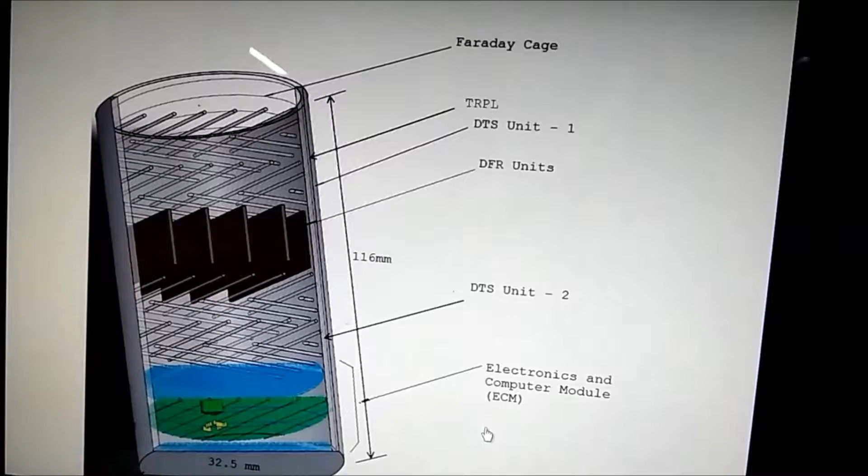So let's get started with our first video log. Let us start with the concepts behind our first preliminary design. This was our initial model. It was a cylindrical design having a circular cross section, and it consisted of three modules.

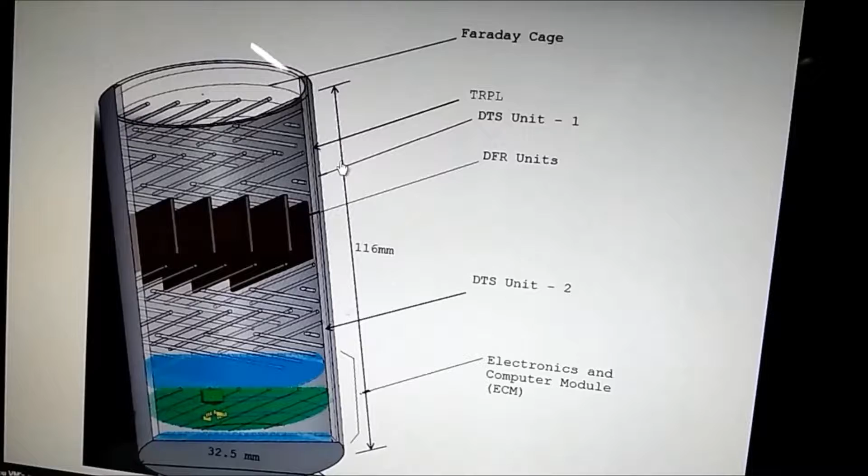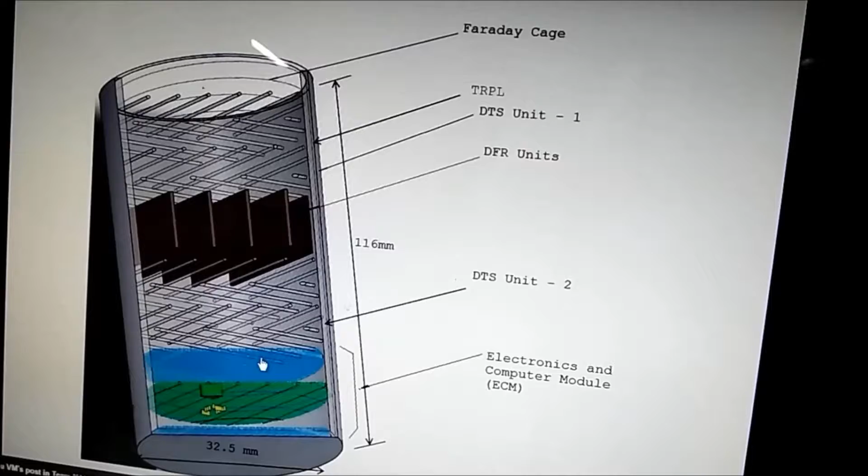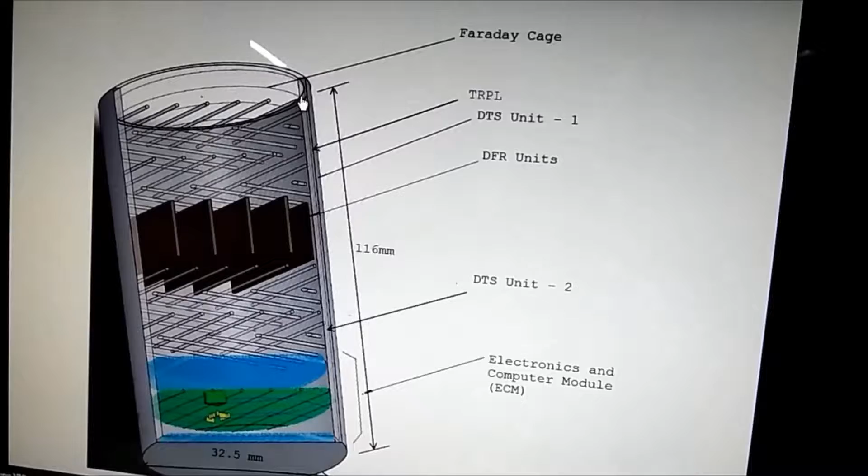One was the sensor module from here to here, there was a dust accumulation rate analyzer, this blue portion you can see, and below it there was the electronics and computer module. This complete system was enclosed by a Faraday cage to avoid any kind of external noise, and the whole module was coated with a thermal protection layer.

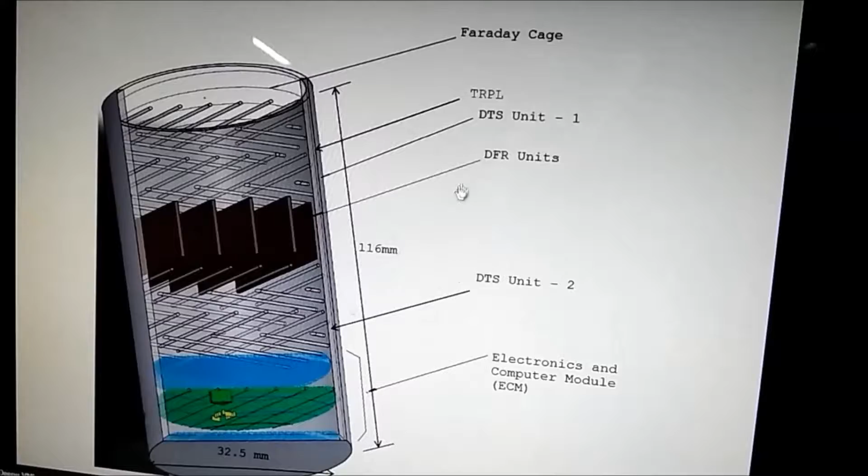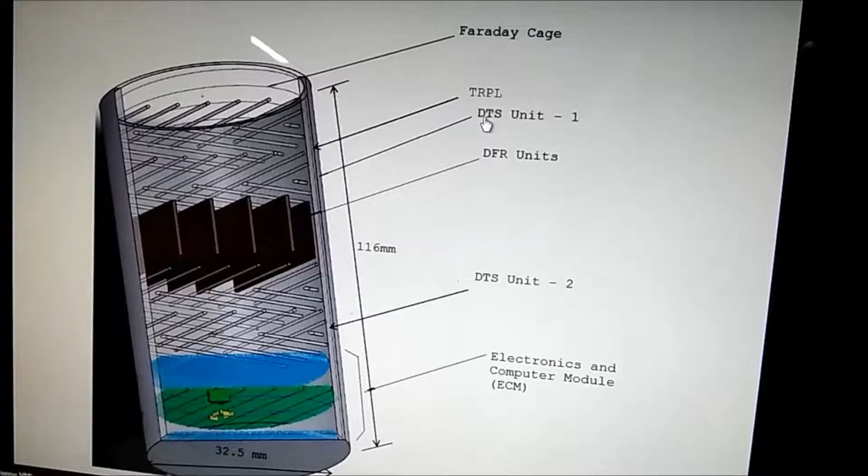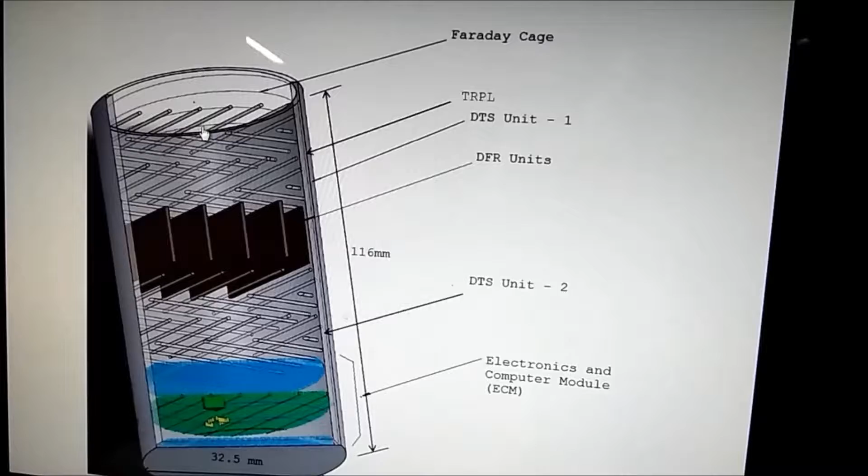Now this sensing module had three units. One was the DFR unit, which is the deflection field region. I'll explain it. And there were two DTS units, DTS 1 and DTS 2. What is DTS? DTS is the dust trajectory sensor. Each of these had 4 layers of electrodes, stainless steel wires, which sense the charge and the trajectory as well as the velocity of any charged particle entering the instrument.

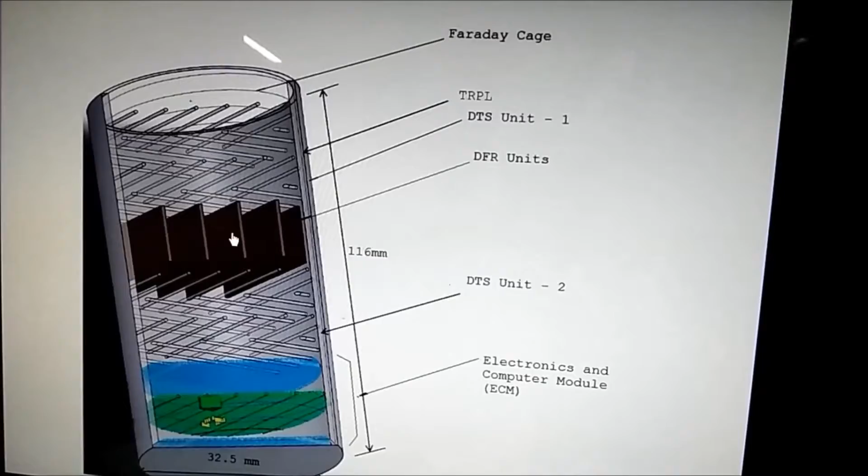Now this deflection field region was used for measuring the mass of the charge. This is our sketch, taken from some literature. This is the first DTS unit and the second DTS unit. These are the layers of the electrodes, and these are the electrodes of the DFR unit. Any charged particle which enters, its direction as well as velocity is detected by the first DTS unit and later by the second DTS unit.

Now these electrodes of the DFR unit have different electric potentials on consecutive electrodes, one with plus 5 kilovolt and the second with minus 5 kilovolt. So any positively charged particle is deflected away from the positively charged electrode, and the deflection is measured from the difference between the trajectories of the two DTS units. This is the whole idea behind our instrument and sensing the parameters of any charged particle.

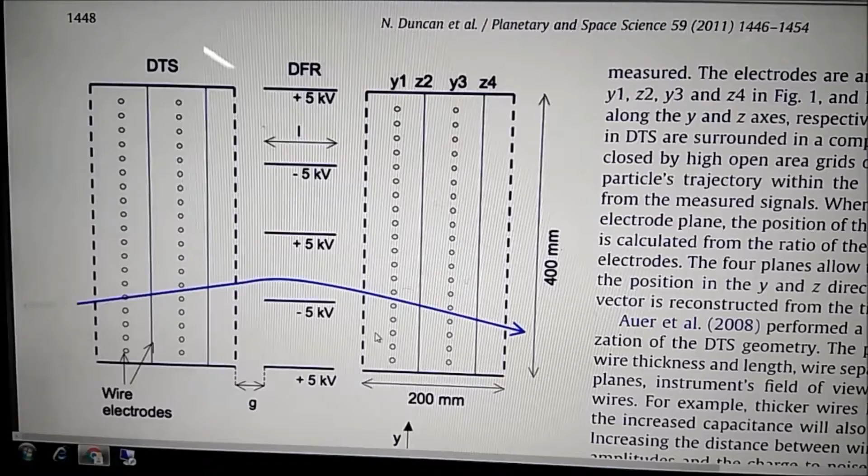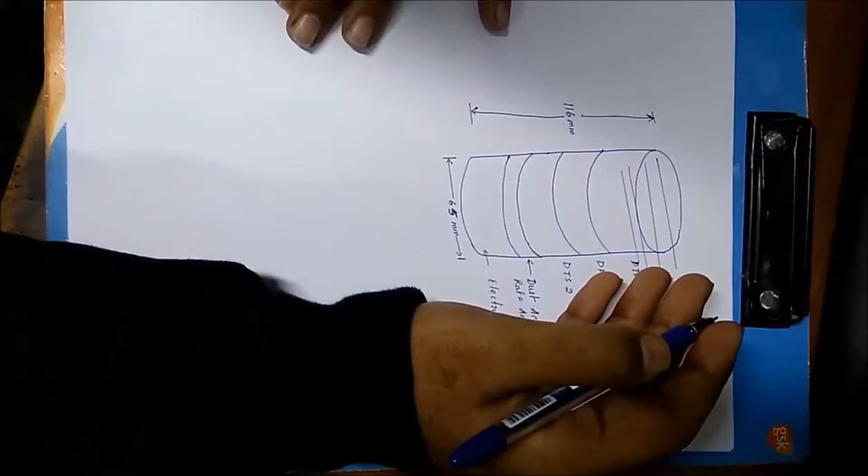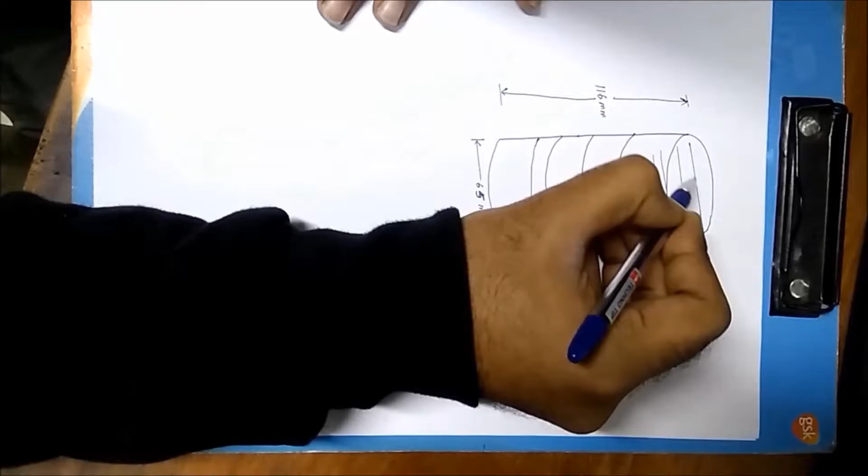So this is our sketch of the design. Each DTS had 4 layers of electrodes, coming out like this. Suppose we are using 5 electrodes per layer. We have to connect one end of each electrode to an amplifier unit, which takes the induced charge signal through the electrode, amplifies it, and gives it to the electronics module, where our onboard computer takes it as input and stores the data or does whatever post processing we need.

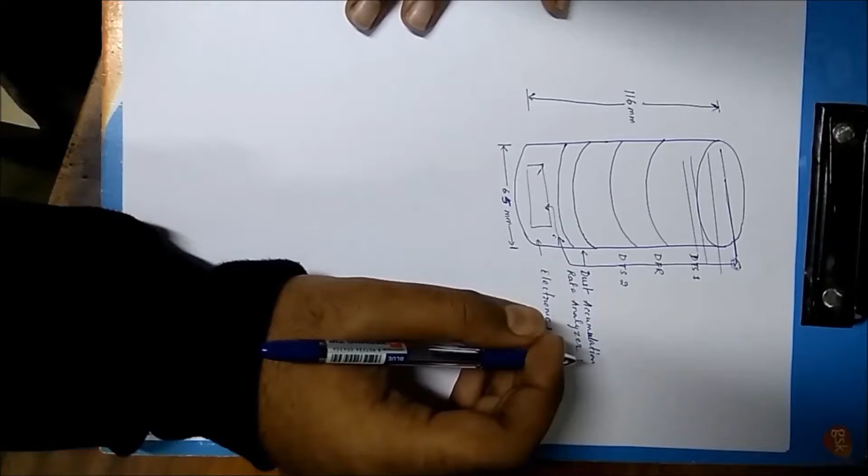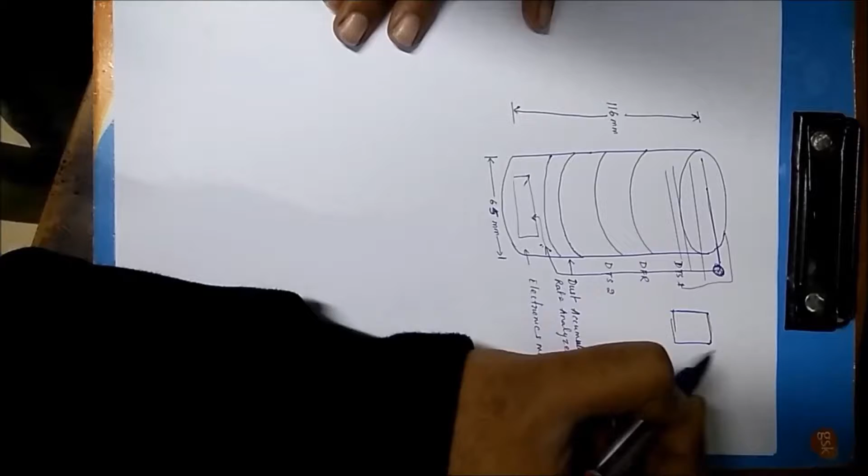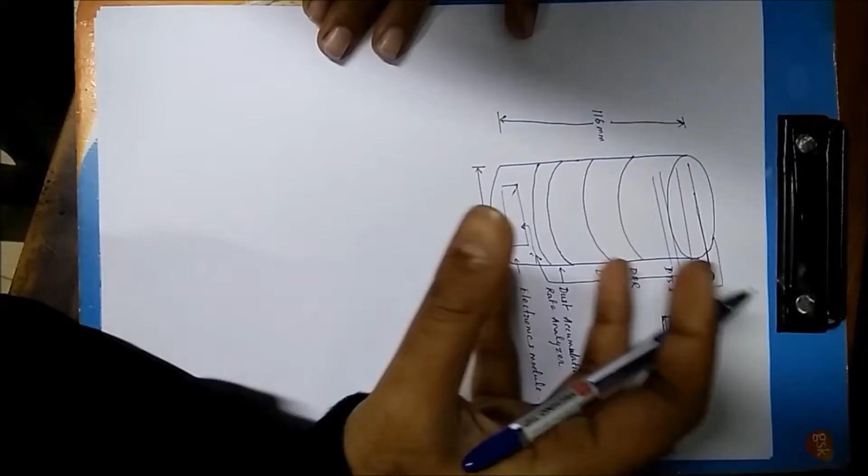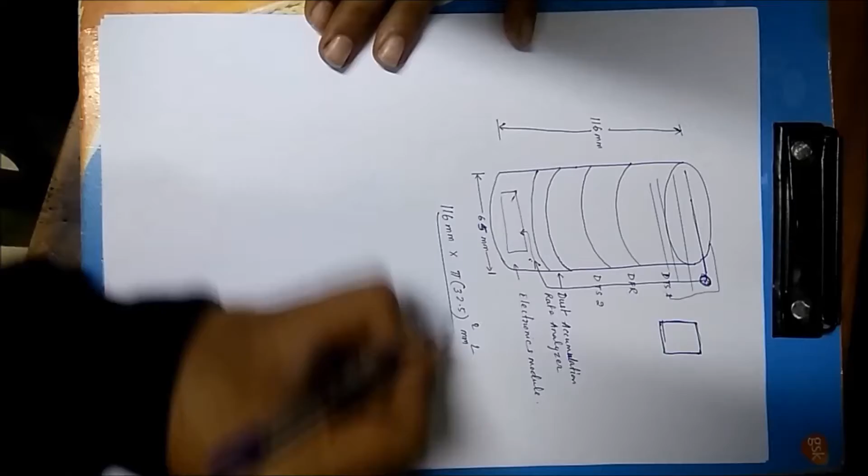But to accommodate these amplifying circuits, we need some space first. Second, there were some scaling issues as per the similarity rule of the literature we are following. If we need to scale down the model they used, we have to follow a similarity rule. That's why we have made some changes in the physical dimensions of our model, but the overall volume we have kept constant, that is 116 mm into pi into 32.5 squared mm squared. This volume is constant, but the physical dimensions changed.

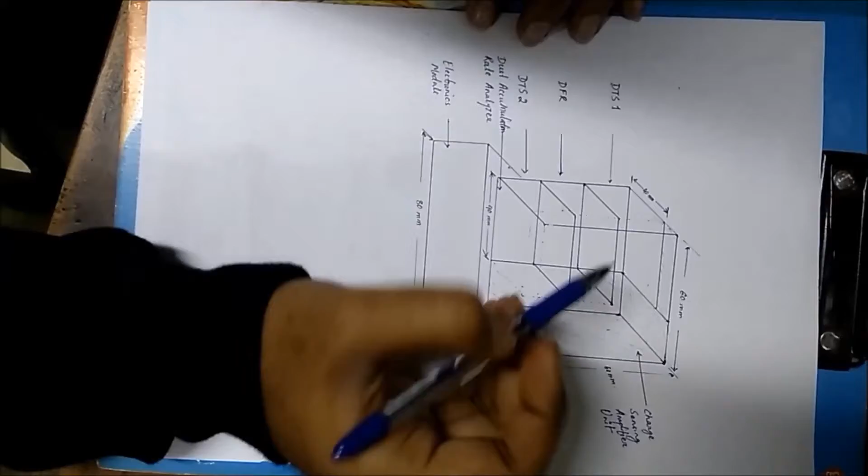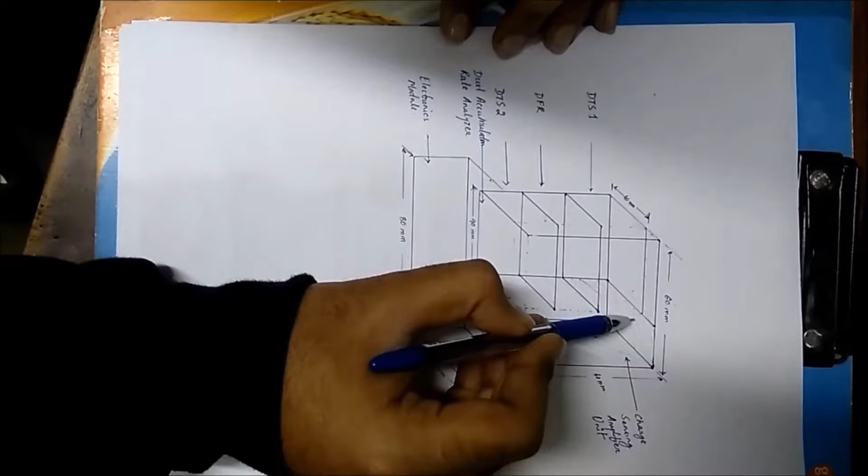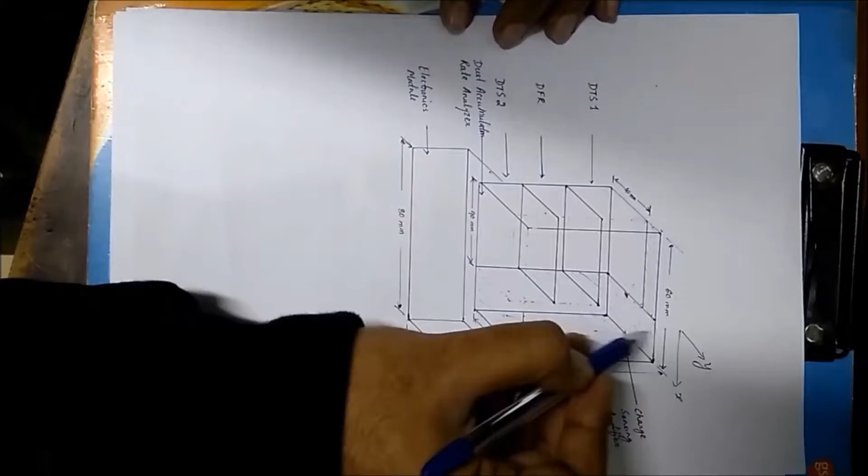So it will look something like this now. We have made our dust sensing module with a 40 by 40 mm cross section and a length of 80 mm. The charge sensing amplifier unit will be accommodated in the remaining 2 centimeters of space from this axis. Suppose this is the x axis and this is the y axis, we can have 2 centimeters on this side and 2 centimeters on this side, so the total box cross section will be 8 by 8 centimeters, and the height of the box would be 8 centimeters.

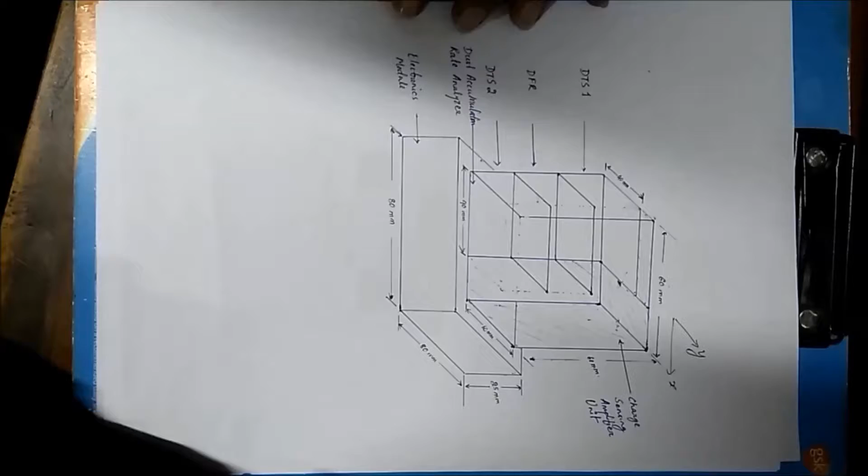Now we can accommodate our dust accumulator unit and electronics computer module in this 8 by 8 cross section module here, which will have a height of only 25 mm, so we are constrained to the overall volume and not exceeding it.

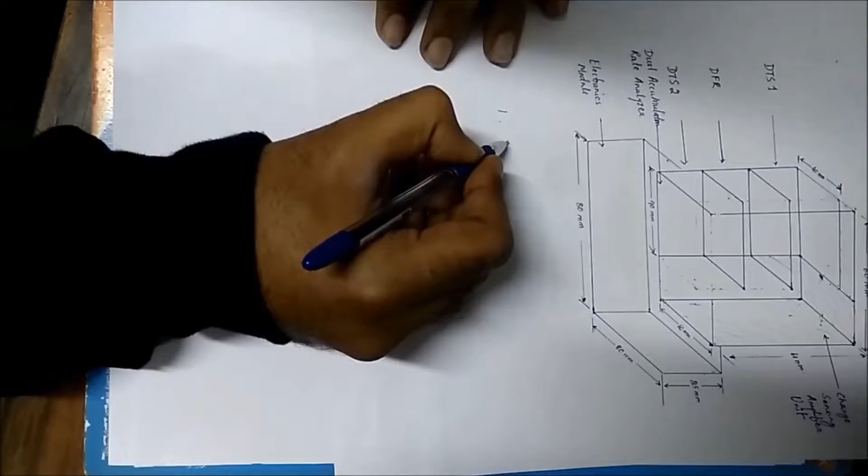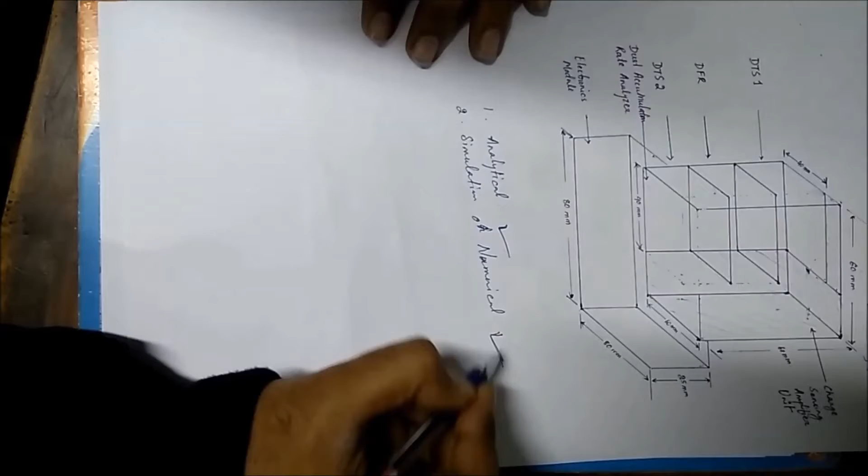Now we are doing some simulation work. Let me tell you the steps we are following, which we already mentioned in our abstract submitted last August. First is our analytical process, which we have already finished. Second is simulation, or numerical solutions, which we are doing now. We are currently on this.

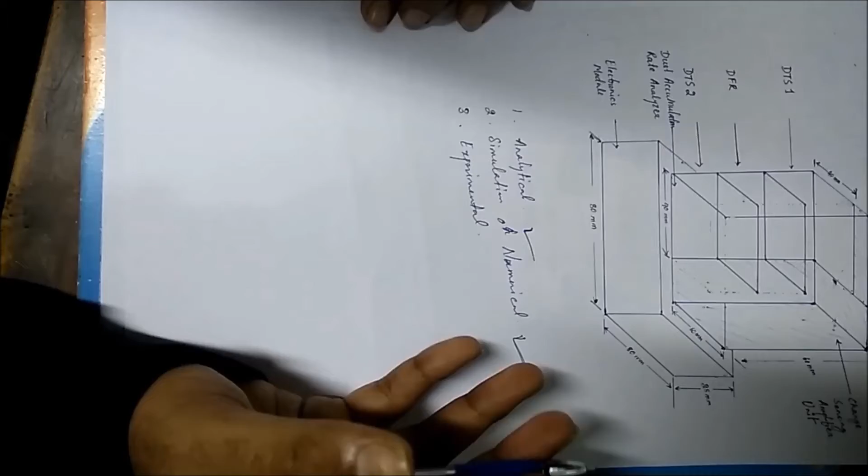Third is experimental, which we will start very soon due to time issues. We have not started yet, but we have ordered all our instruments, parts, electronics. We need to assemble them, check, and validate the simulation and analytical data with the experimental results. If any changes are required, we will make them, and we will share all the updates very soon.